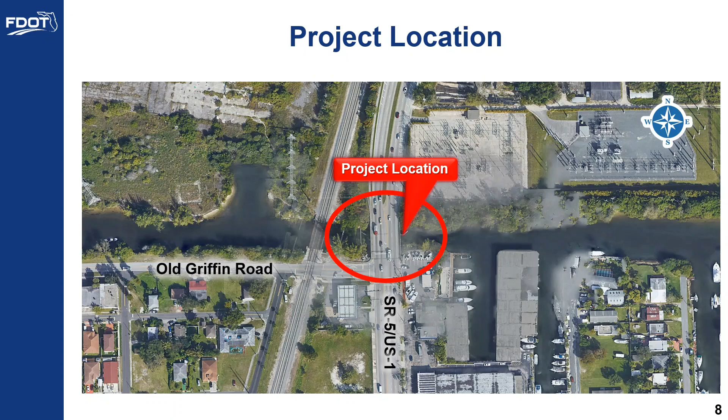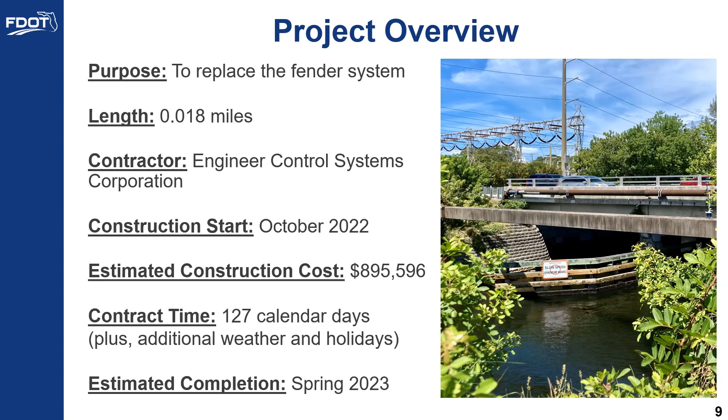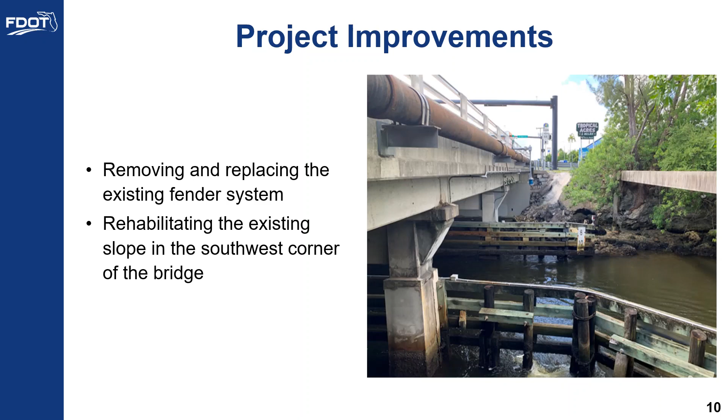Slide 10, project improvements. Project improvements include removing and replacing the existing fender system and rehabilitating the existing slope in the southwest corner of the bridge as shown in the photo below.

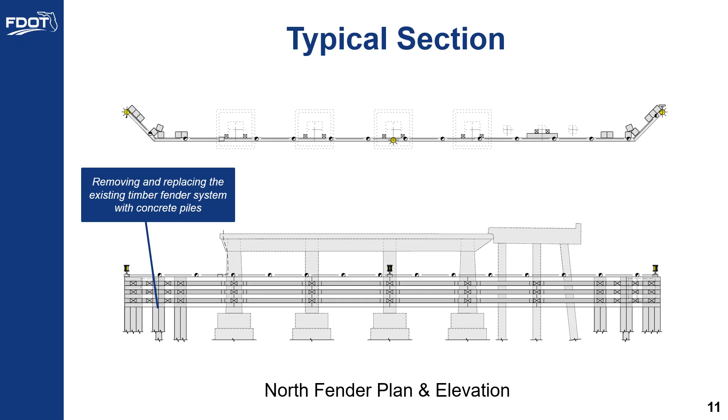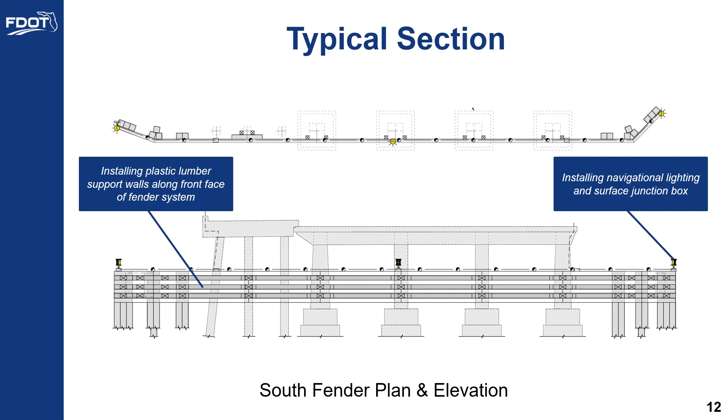Slide 12, typical section. This slide shows the south fender plan and elevation. As part of the work on the fender systems, we will also be installing plastic lumber support walls along the front face of the fender system and installing navigational lighting and a surface junction box.

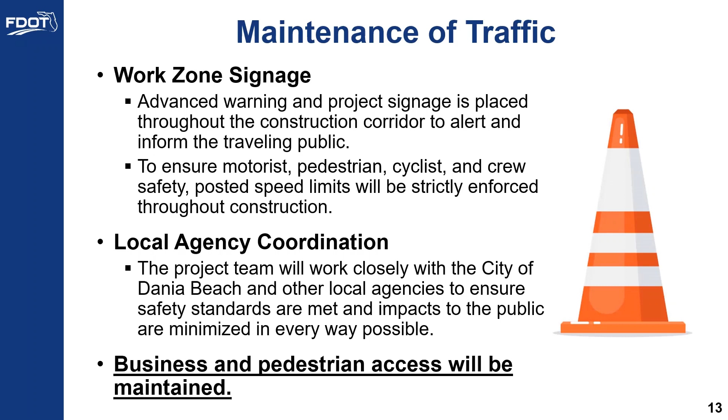We will be coordinating with local agencies, businesses, and residents to ensure access at all times. This includes the Broward County Traffic Engineering Division, City of Dania Beach, Broward County Transit, first responders, and Broward County Schools.

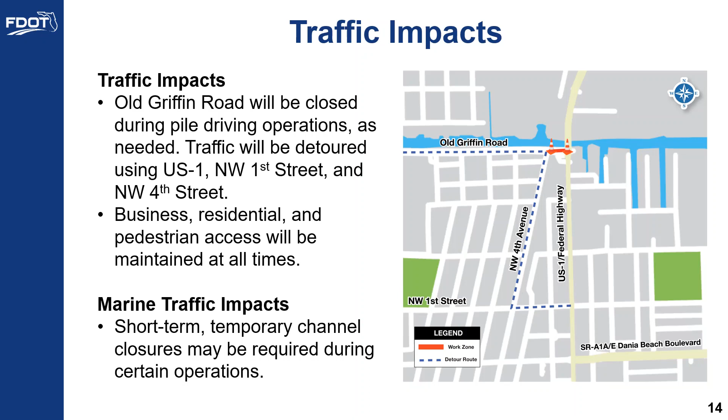Slide 14, traffic impacts. Old Griffin Road will be closed during pile driving operations as needed. Traffic will be detoured using US 1, Northwest 1st Street, and Northwest 4th Avenue. Business, residential, and pedestrian access will be maintained at all times. Short-term, temporary channel closures may be required during certain operations.